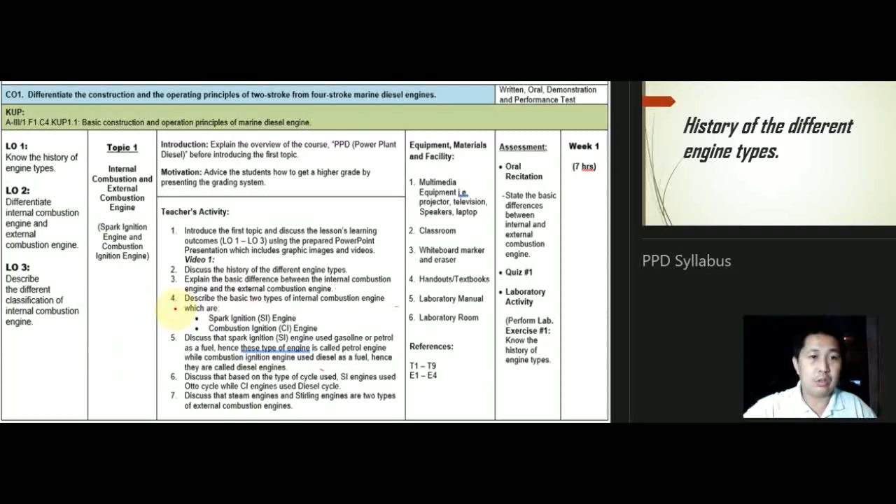We will continue with our topic. In this topic, we have to discuss the history of the different engine types. The invention of the internal combustion engine - various scientists and engineers contributed to the development of the internal combustion engine.

In 1791, the English inventor John Barber patented a gas turbine. Anyway, if you want to know all of this, the beginning of the history of the engine, just read this, and you can also read the encyclopedia. But I want to start here, which is very relevant to our main topic.

In 1892, Rudolf Diesel developed the first compressed charge compression ignition engine, which is a diesel engine. In 1926, Robert Goddard launched the first liquid fuel rocket.

In 1939, the Heinkel He-178 became the world's first jet aircraft. And in 1954, German engineer Felix Wankel patented a pistonless engine using an eccentric rotary design - the rotary engine.

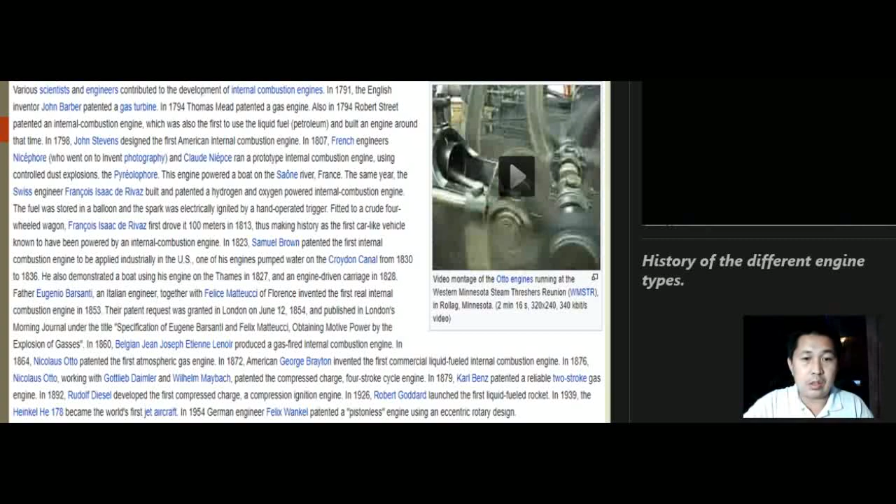So let's continue. We'll see here the old engine as they invented before.

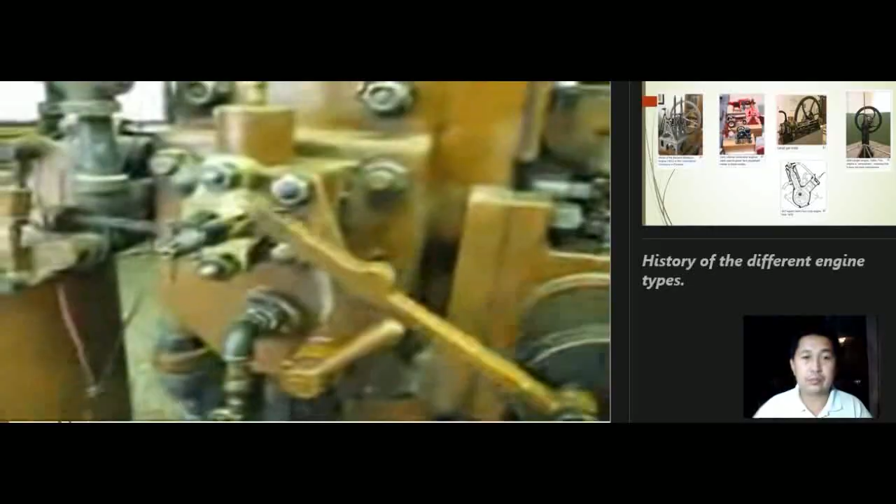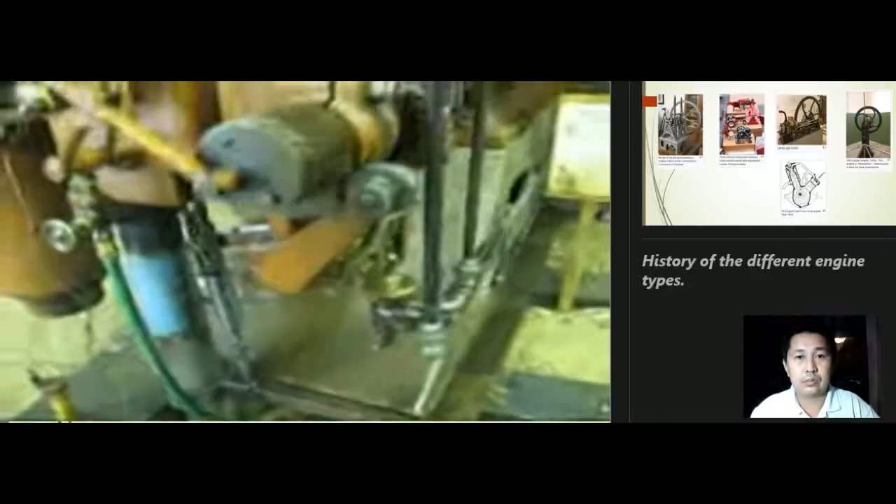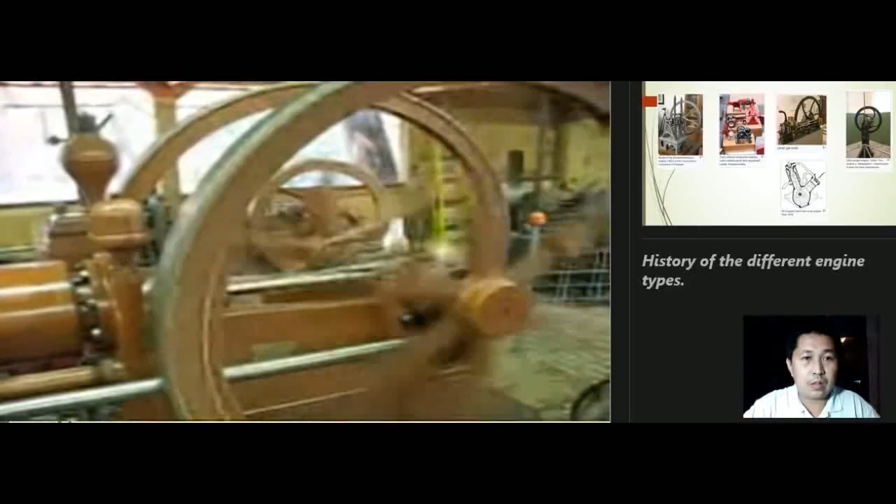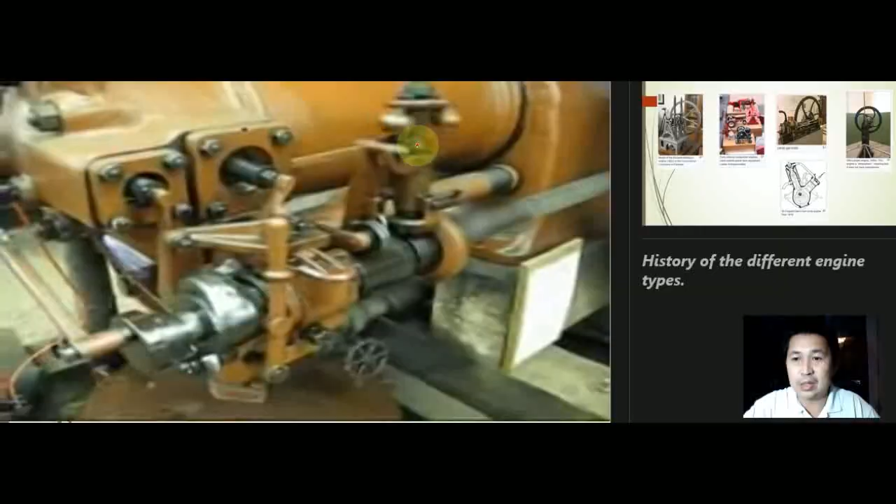So, old system engine. As you look at the governor, the flyweight of the governor is visible outside. But in newer engines, this flyweight is located inside the governor, so you cannot see it anymore. Let us proceed.

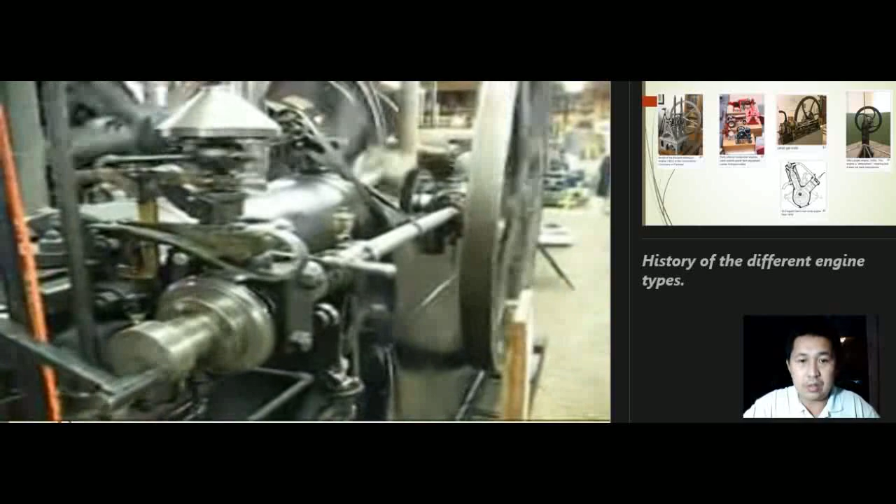These are engines that were invented long time ago, since the 19th century. So you cannot see this type of engine anymore nowadays.

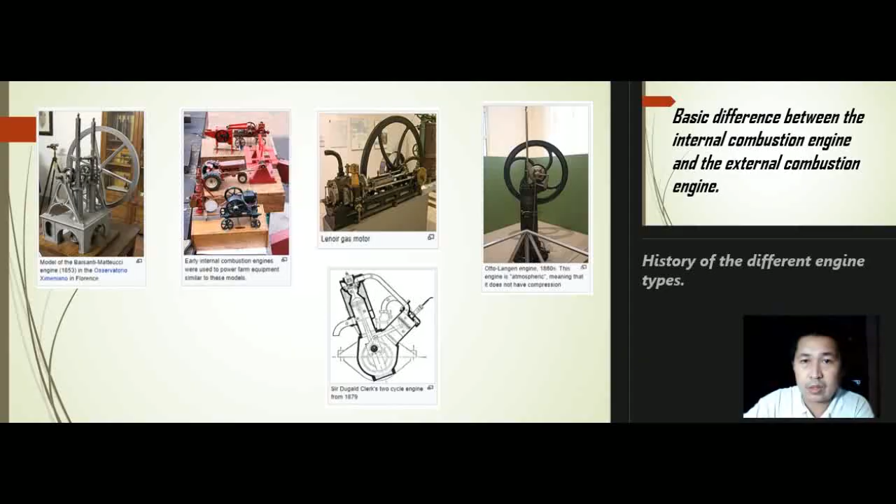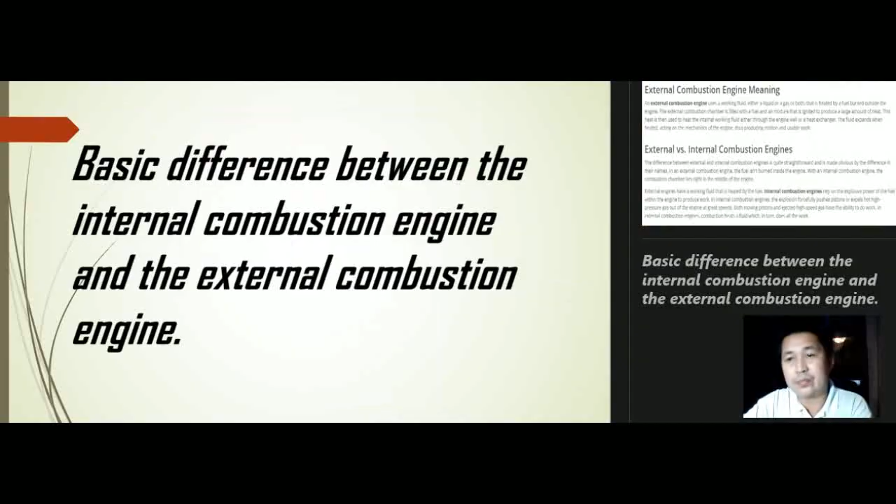Next, the basic difference between the internal combustion engine and the external combustion engine. An external combustion engine uses working fluid, either a liquid or gas or both, that is heated by a fuel burned outside the engine. One example of an external combustion engine that still exists nowadays is the steam engine, or steam turbine. Later on I will show you the video of the external combustion engine.

So, external versus internal combustion engine. The difference between external and internal combustion engine is quite straightforward and is made obvious by the difference in their names. In an external combustion engine, the fuel isn't burned inside the engine. With an internal combustion engine, the combustion chamber lies right in the middle of the engine.

So I will make a simple presentation here. In an external combustion engine, the fuel is burned outside, isn't burned inside the engine cylinder, meaning outside. So where is this fuel being burned? Here there is a boiler. The fuel and air mixture is burned through the boiler furnace to heat water.

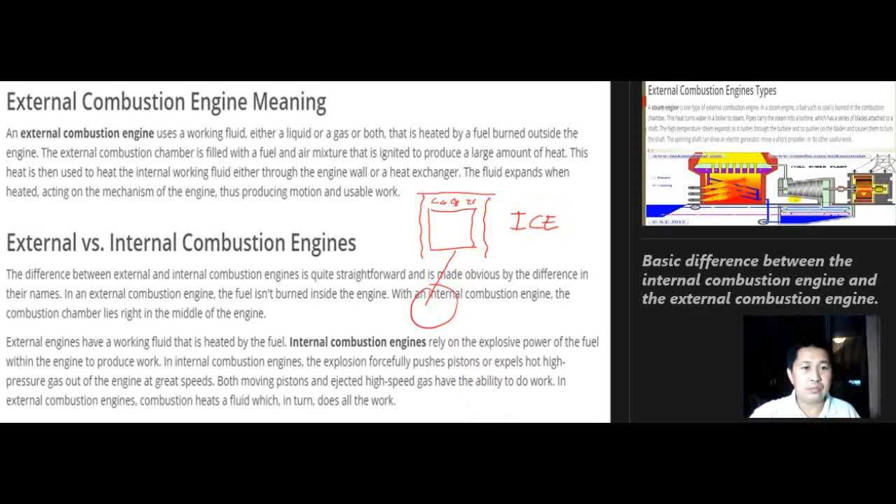So now let us proceed. This is an example of an external combustion engine, the steam engine, one type of external combustion engine. In a steam engine, fuel such as coal or bunker fuel is burned in the combustion chamber of the boiler.

This heat turns water in the boiler into steam. Pipes carry the steam into the turbine, which has a series of blades attached to a shaft. As you can see here, there is burning of air and fuel inside the furnace of the boiler, and in this pipe there is water circulated.

The water is being heated and produces steam. As you can see here on top of the steam drum, there is steam produced. This steam produced is pressurized and flows to the steam turbine, so the steam turbine blades spin or rotate due to the high pressure of the steam. This steam turbine blade is connected to the shaft, and the generator is connected to the shaft. So the generator is producing electricity. If this steam turbine is the main engine of your ship, then your ship will run.

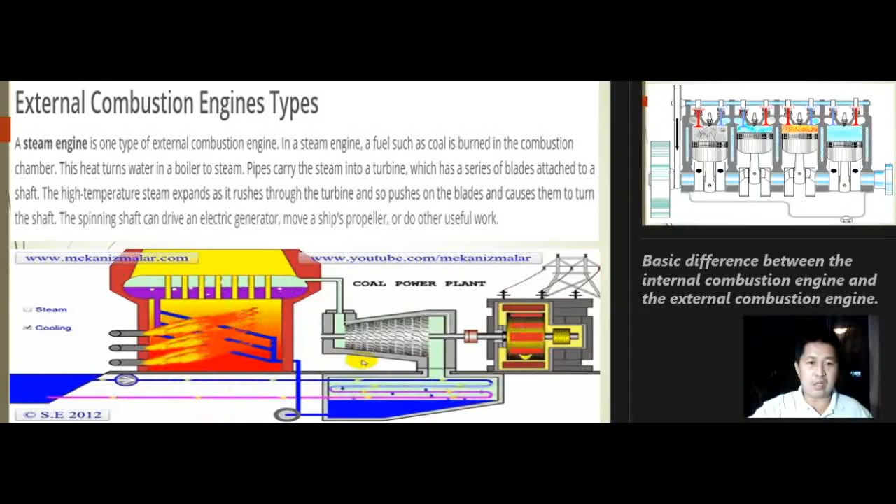So this is an example of an external combustion engine, because in the steam turbine engine itself there is no burning of air and fuel mixture; instead it happens in the boiler, which is outside the engine. So that is an external combustion engine. Let us continue.

Now, here is an example also of the internal combustion engine, because we are differentiating here between the internal combustion engine and the external combustion engine. As you can see, there is burning of air and fuel mixture inside the engine cylinder. All of the cylinder has burning of air and fuel, and this is called combustion. This is called internal combustion engine because the air and fuel mixture is burned inside the engine cylinder, as you can see. It is firing inside, there's combustion, so that is an internal combustion engine, or ICE.

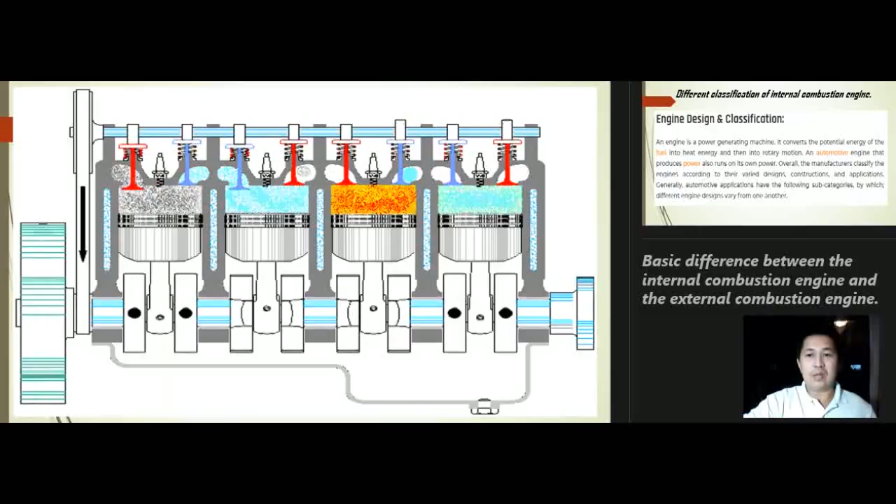So let us proceed to the different classifications of internal combustion engine: engine design and classification.

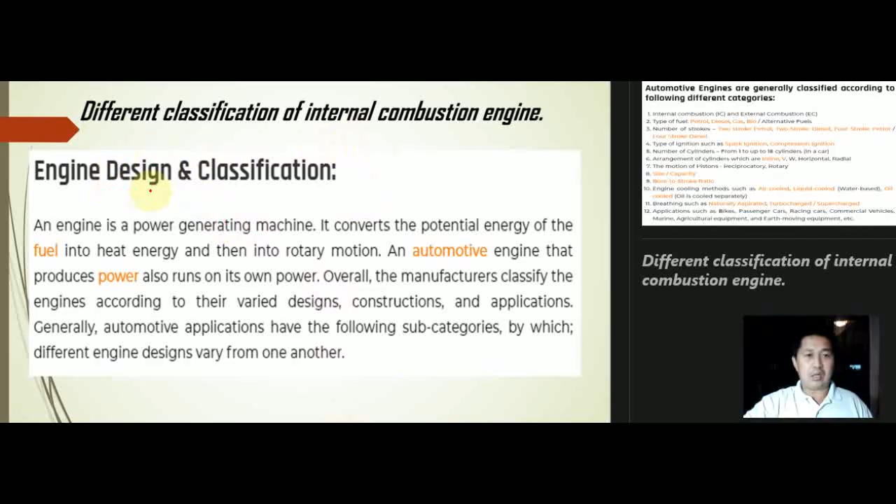So here in my presentation I use automotive engines. Automotive engines are generally classified according to the following different categories. On board the ship, our engine is bigger, a big engine. But here, although this is a smaller engine because this is for automotive, they are the same in principle. But in the design, like cooling system and others, they are different, but the principle is the same. So how are these engines categorized and classified according to their categories.

So we have internal combustion engine, IC, and external combustion engine, EC. We also have type of fuel, which is petrol. Petrol is a British term, but in American term this is gasoline. So we have diesel, gas, biofuel, and alternative fuels.

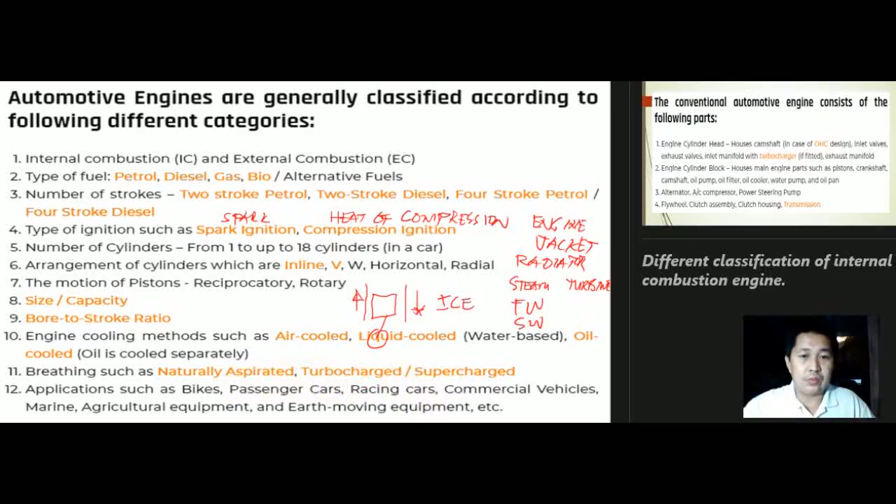So the conventional automotive engine consists of the following parts. Just read the parts of the engine.

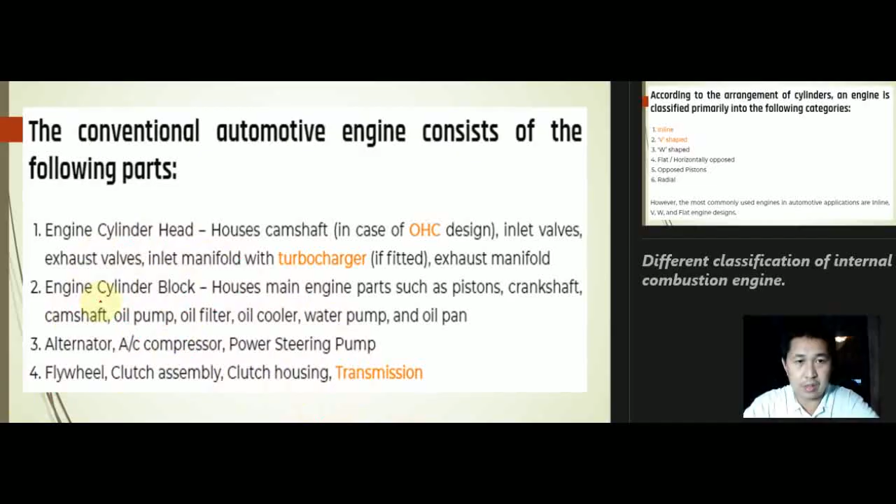According to the arrangement of the cylinders, an engine is classified primarily into the following categories: we have inline type, V type, W type, flat horizontally opposed engine, opposed piston, and radial.

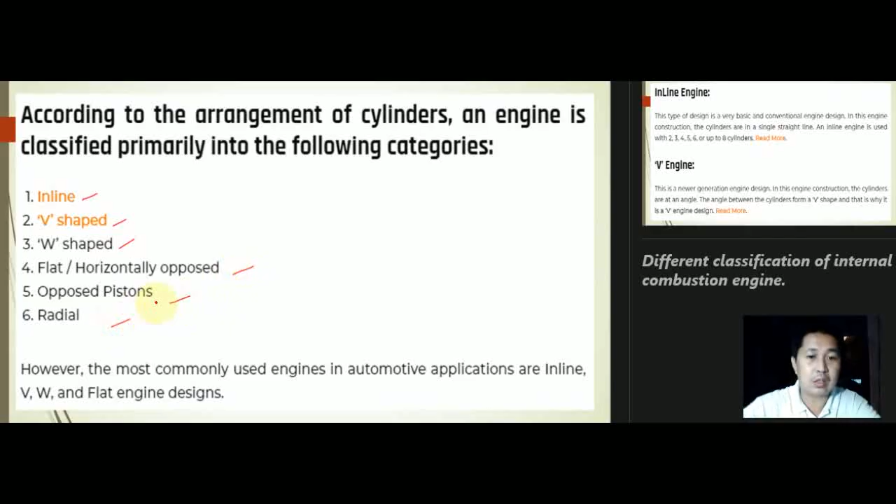So just remember this: when you hear that the cylinders are in a straight line, this means inline engine. The angle between the cylinders forms a V shape - remember, these cylinders form a V shape. This one is V-type engine.

So what is an inline engine, its design and characteristics? An inline engine is a type of engine design that is very basic and conventional. In this type of engine construction, the cylinders are placed in a straight line - remember this keyword. As you can see here, the cylinder is arranged in a straight line, so that is inline type engine.

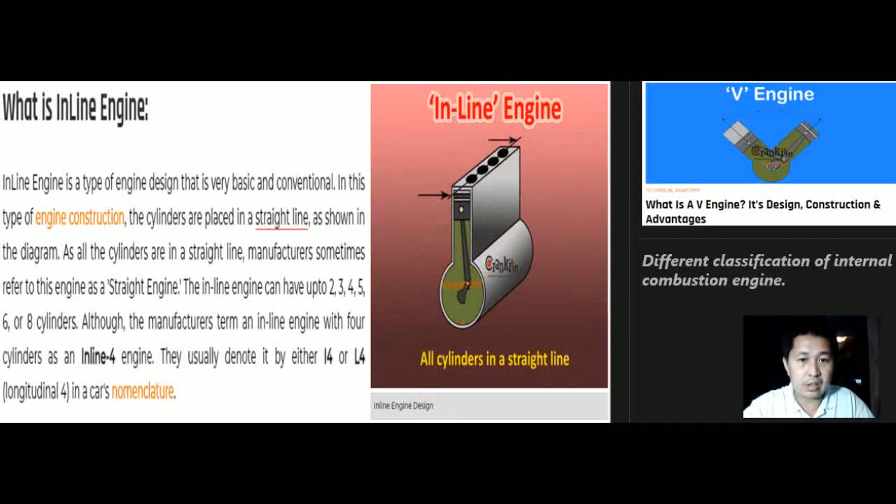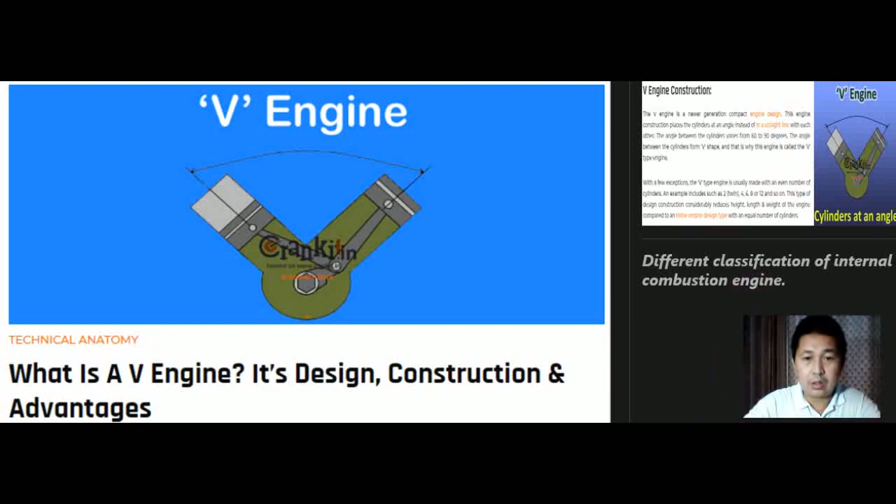So what is a V engine or V-type engine, its design, construction, and advantages? Let us proceed. The V engine is a newer generation compact engine design. This engine construction places the cylinder at an angle instead of in a straight line with each other. As you can see here, this forms a V - that's why we call this engine V-type engine. So cylinders are at an angle of 60 to 90 degrees.

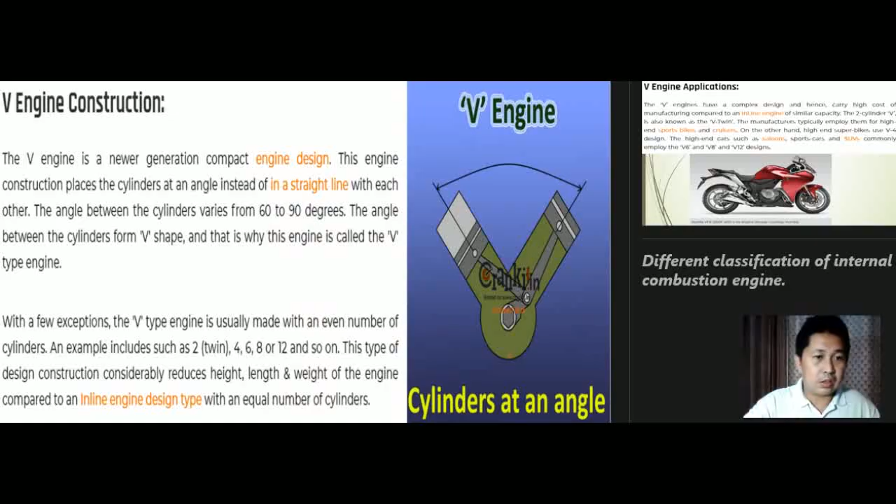One example here of application is this big bike, the Honda big bike, which has a fitted V-type engine. But on board the ship, I experienced this before - I experienced a Caterpillar engine. This engine is a disadvantage to the engineers during overhauling because there is a lot of pistons to overhaul. I experienced a Caterpillar engine with 16 cylinders, so a lot of pistons to overhaul, whereas if the engine is inline, there are only a few pistons, and it is more comfortable to overhaul because the inline engine has only a few pistons, whereas the V-type engine in a bigger engine has a lot of pistons.

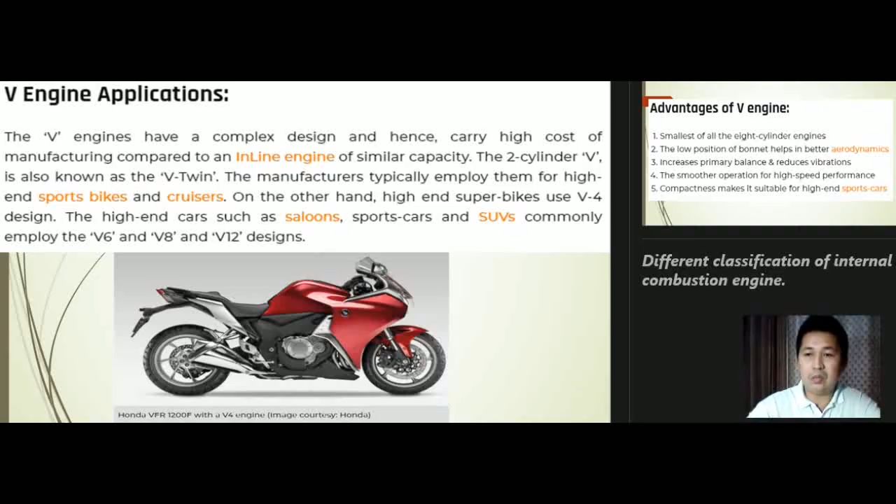So we have also here the advantages of the V engine. So the smallest of all the 8-cylinder engines. The low position of bonnet helps in better aerodynamics, increases primary balance and reduces vibrations. The smoother operation for high speed performance. Compactness makes it suitable for high-end cars, sports cars.

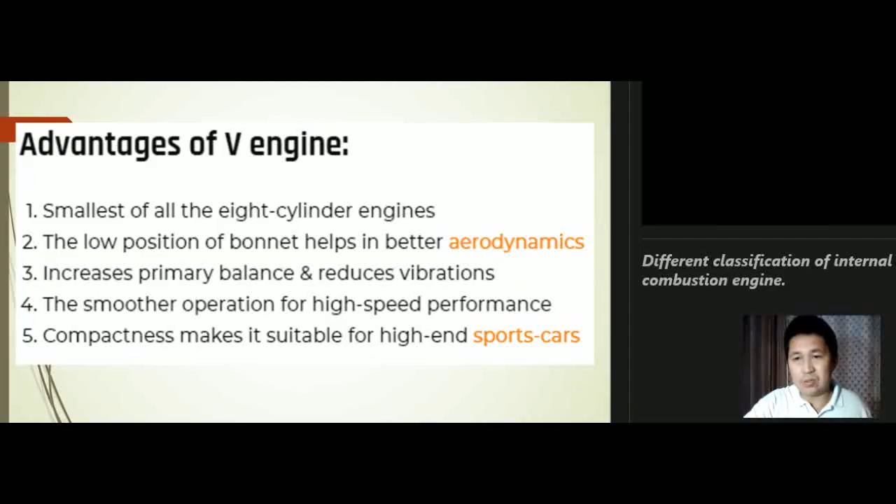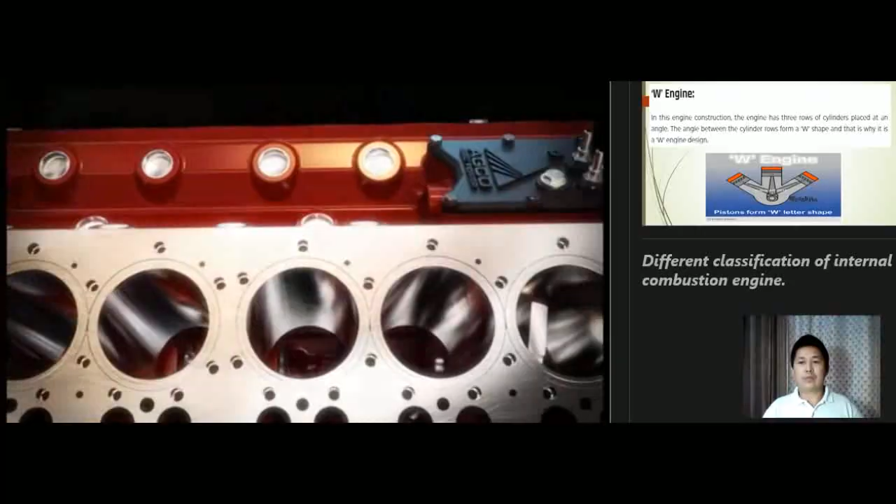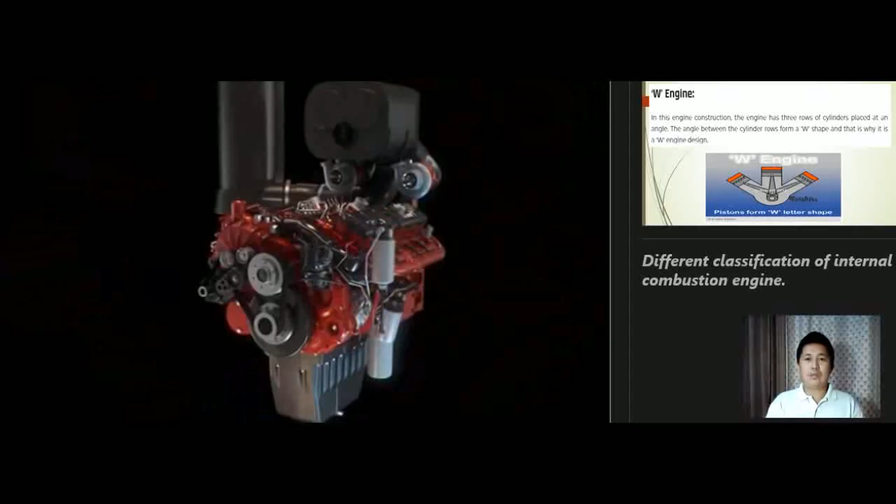So this is good for the automotive engines, but in the marine engine, if the engine is V type, during overhauling there are a lot of pistons to overhaul. So it is not comfortable for the engineers during maintenance and overhauling. So I will show you an example of V-type engine. So as you can see, that is V-type engine.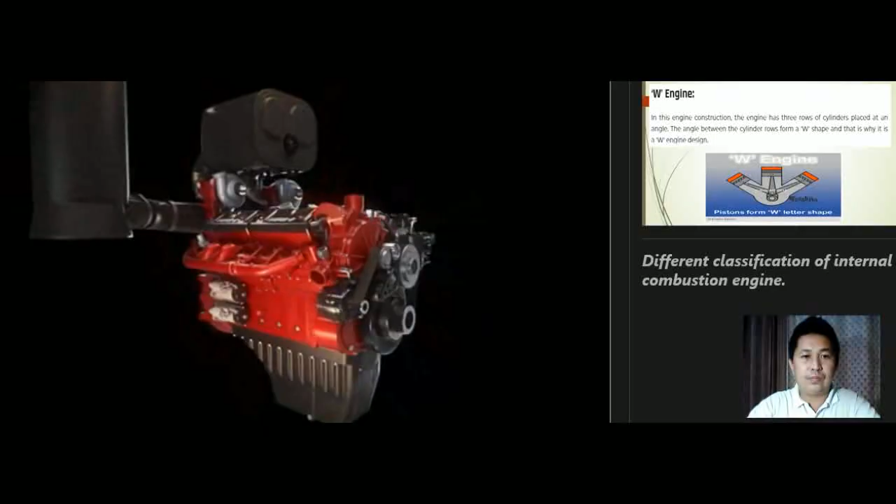So if we have a V-type engine, we have also W-type engine. In this engine construction, the engine has 3 rows of cylinders placed at an angle. The angle between the cylinder rows forms a W shape, and that is why it is a W engine design. In my experience, I did not see this engine before. I do not know where this engine is being applied or fitted.

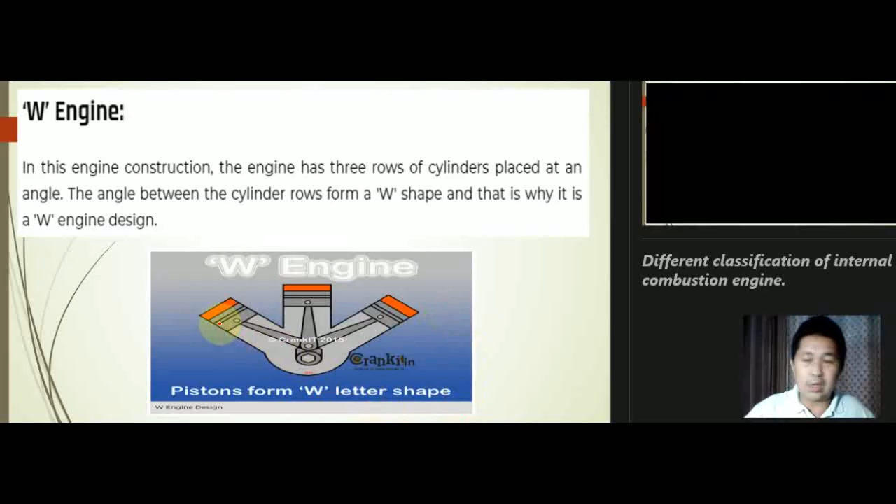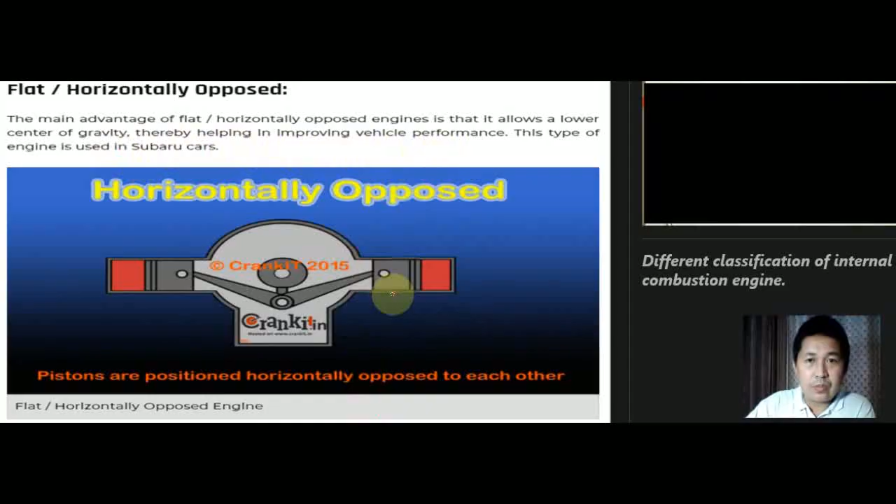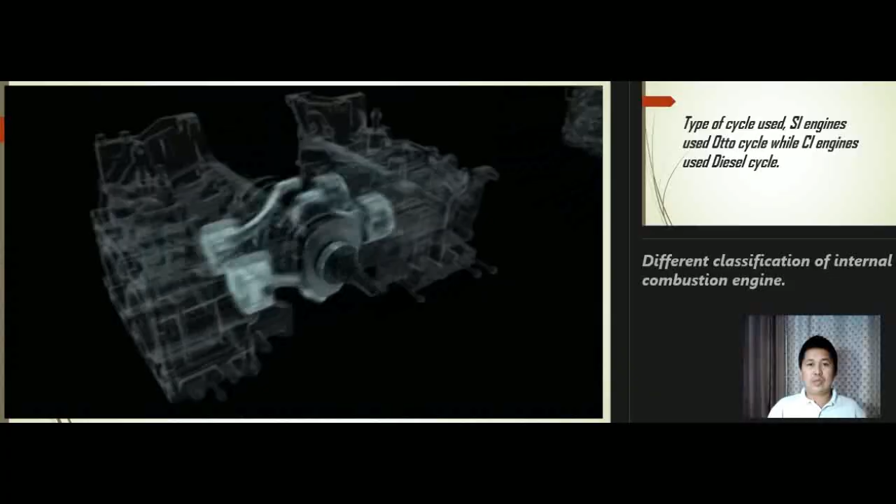So we have also flat horizontally opposed engine. The main advantage of flat horizontally opposed engines is that it allows a lower center of gravity, thereby helping in improving vehicle performance. This type of engine is used in Subaru cars. We have here the clips. This is also called boxer engine, mostly fitted to Subaru automotive cars. So that is a flat engine, as you can see. The piston is in a horizontal position, both sides.

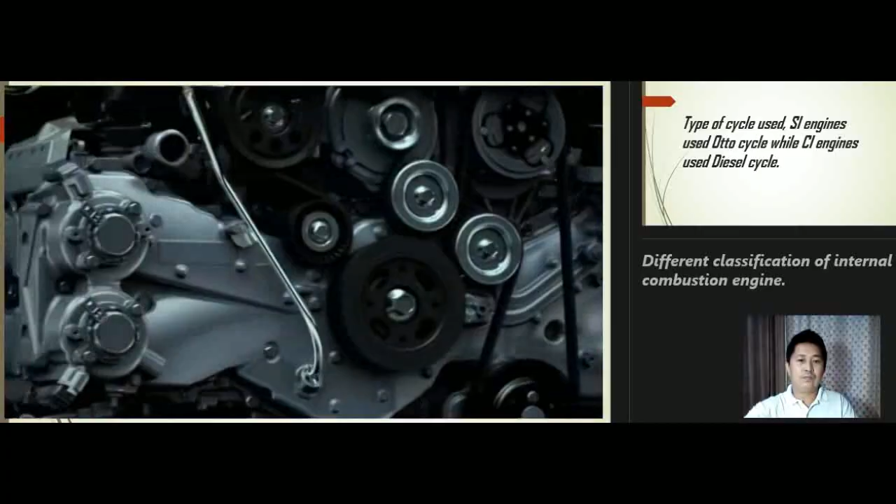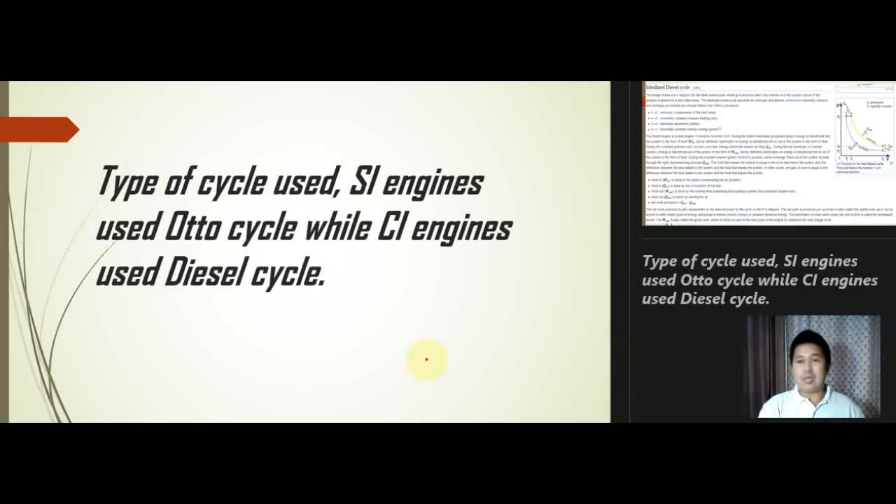So we will proceed to the type of cycle used. SI engines use the Otto cycle, while CI engines use the diesel cycle. For your information, the internal combustion engine uses the principles of thermodynamics. So we have here a PV diagram for the ideal diesel cycle. The cycle follows the numbers 1 to 4 in a clockwise rotation. Later on, we have to differentiate the difference between the Otto cycle and the diesel cycle.

So if you were being interviewed, the question is: what is the difference between the Otto cycle engine and the diesel cycle engine? You have to answer: in the Otto cycle engine, during ignition and combustion, the pressure increases, while in the diesel cycle engine, during ignition and combustion, the pressure is constant. So here is the diagram.

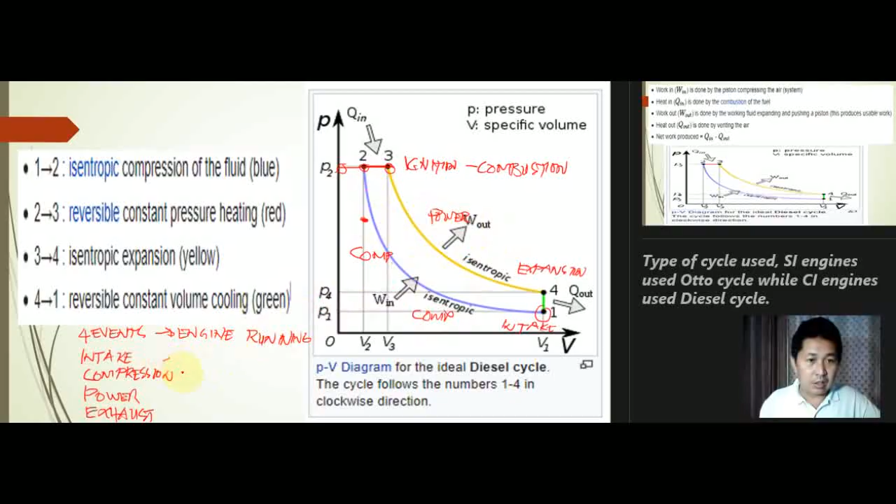So from 3 to 4, that is called power. So intake, compression, power, and 4 to 1, that is exhaust. That is the cycle of the engine, the diesel cycle. 1 to 2 is isentropic compression. 2 to 3, reversible constant pressure heating, or heat addition. Here, Q in is called heat addition.

Because the ignition and combustion is occurring here in 2 and 3. Here is isentropic expansion, because the expansion of gases after the combustion is happening inside the engine cylinder and pushing the piston down. So this is your piston. This is your cylinder. And this is your piston. So during expansion here, combustion, there is an expansion of hot gases, and it is pushing down the piston so that the crankshaft will rotate. So that is isentropic expansion when we are using thermodynamics.

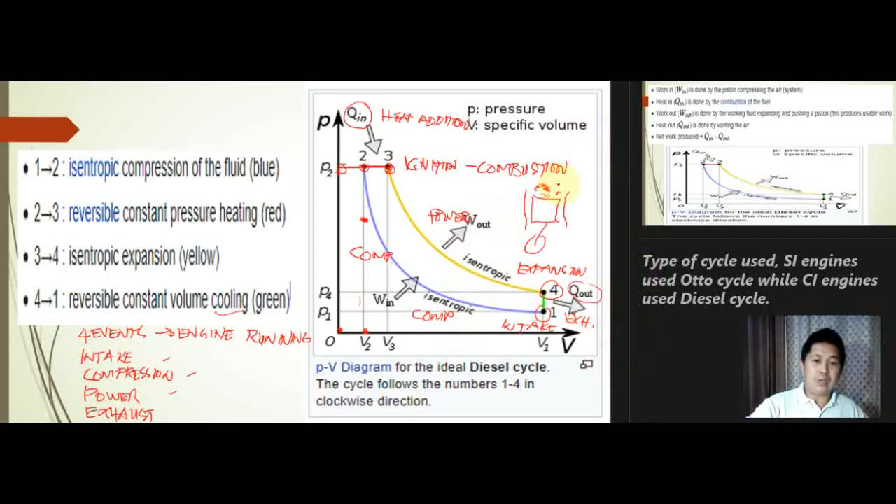of air. But during combustion, the pressure inside the cylinder is constant during ignition and combustion, and by the result of the combustion, there is an expansion of hot gases. So at the start of the expansion, the pressure is highest, and then the pressure is lowering because the piston will go down and the space of the cylinder becomes bigger. So that is the explanation of the diesel cycle, and we'll proceed to the next.

So we have here work in, done by the piston compressing, from 1 to 2, and heat in, which is heat added, done by the combustion, from 2 to 3, and work out, done by the working fluid expanding and pushing the piston. This produces usable work, from 3 to 4, and then heat out, or heat rejection, done by venting air, from 4 to 1. The exhaust gases are released through the exhaust pipe leading to the atmosphere, pushed by the pressure of fresh air, and then the cycle repeats.

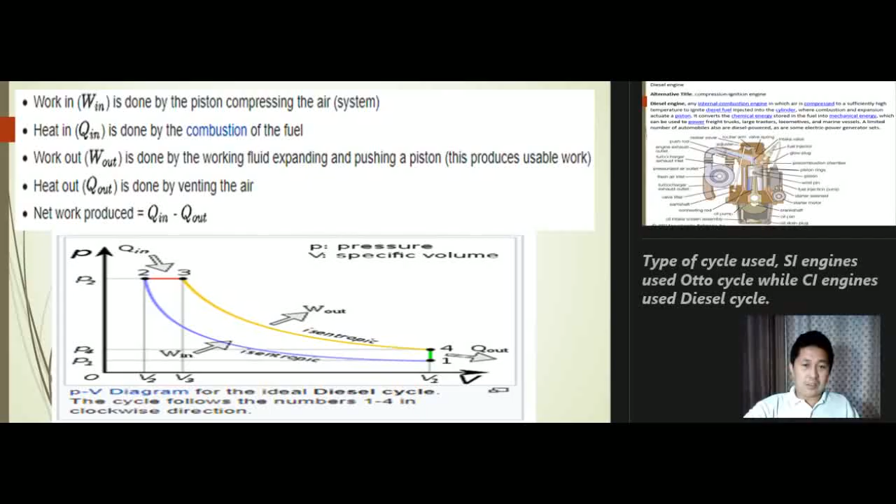Then from 1, again it is an intake stroke, then compression stroke, 1 to 2. Here is the ignition and the combustion, 2 to 3, and 3 to 4 is the power stroke, and 4 to 1 is the exhaust. So that is the cycle of the diesel engine when it is running. So we have here the parts of the engine. You just read all the parts for the purpose of your familiarization. So you just read.

So in the description here, the internal combustion engine in which air is compressed. As I discussed a while ago, this belongs to the diesel engine, or CI engine, because the method of igniting fuel here is by means of heat of compression. So chemical energy, which is your fuel; mechanical energy, which is the energy being created by your engine when it is running, creating power.

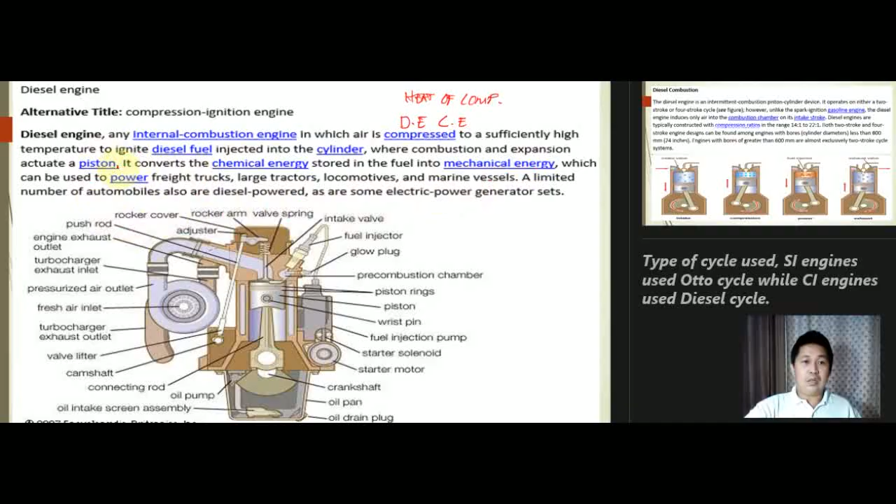So as you can see in this presentation, intake stroke, the piston is at bottom dead center, your intake valve is open, and the supply of air is entering the cylinder. In the compression stroke, the piston is moving upward, your intake valve is closed, so your air is being compressed. And we have here the power: the fuel is sprayed by the fuel injector, and because of the heat of compression, it will ignite the fuel and air mixture, resulting in combustion inside the cylinder and an expansion of hot gases.

Therefore, your piston is being pushed by the expanding gases. Your piston moves down to rotate the crankshaft. The last stroke is the exhaust stroke. Your exhaust valve is open, your piston is moving upward, and your exhaust gases are expelled through the exhaust valve to the exhaust pipe leading to the atmosphere, and then it returns again to the intake stroke. So that is the cycle of the internal combustion engine in this presentation. This is a diesel engine.

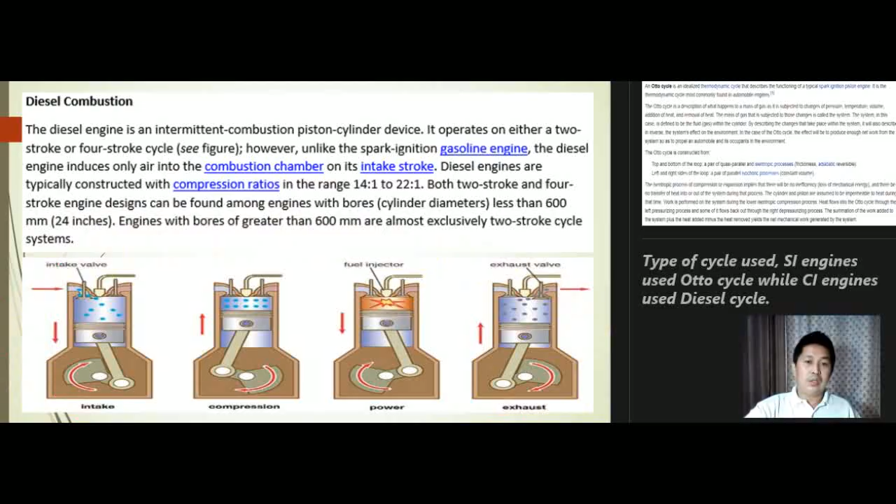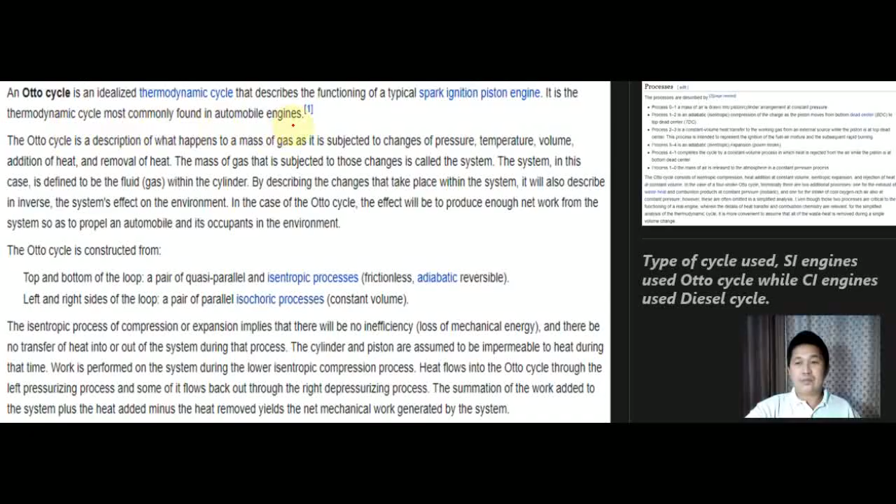So we will proceed to the Otto cycle. The Otto cycle is an idealized thermodynamic cycle that describes the functioning of the typical spark ignition piston engine. It is the thermodynamic cycle most commonly found in automobile engines. So let us proceed. Here I will explain to you how this Otto cycle works. We are now using the pressure volume diagram taken from thermodynamics. As you can see, from 0 to 1 here, this is intake stroke.

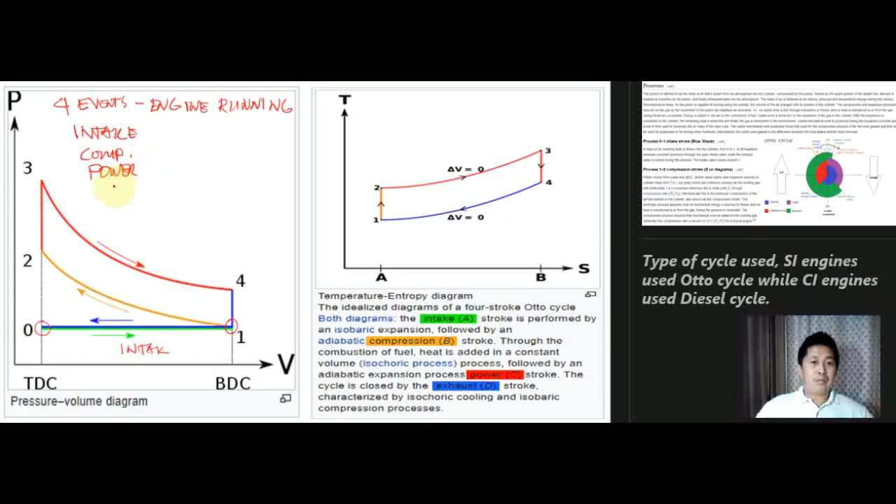So four events: intake, compression, power, exhaust. So 1 to 2 is compression. 2 to 3 is ignition.

So ignition, combustion. And then 3 to 4 is power or expansion. And then 4 to 1 is exhaust.

So as you can see, as I mentioned a while ago, during the ignition and combustion, the pressure increases in the Otto cycle, while in the diesel cycle it is constant. So in the diesel cycle here, the pressure is constant, so 2 to 3. But in the Otto cycle the pressure is increasing. So that is the difference of the Otto cycle and the diesel cycle.

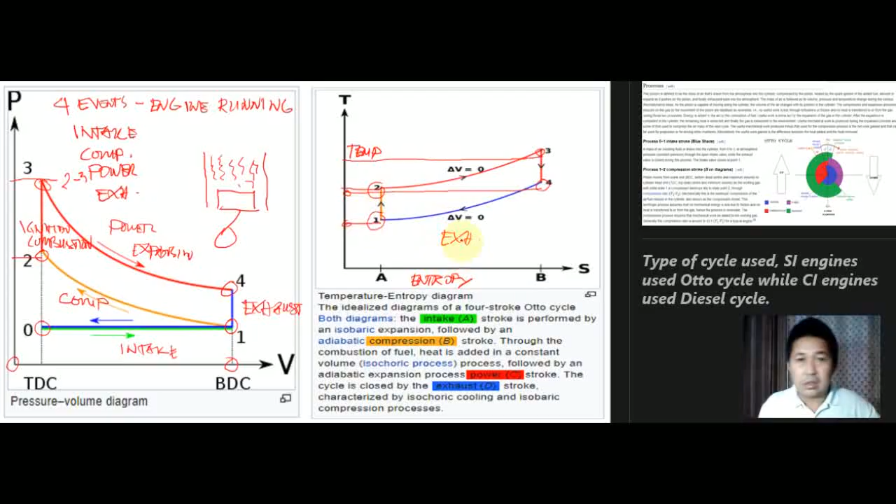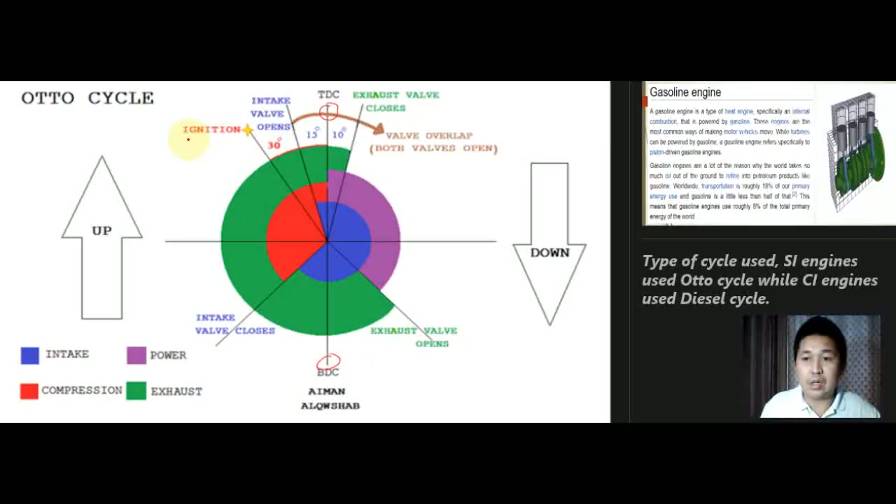So next, this is your Otto cycle, the rotation of the crankshaft in relation to the position of the piston. So here the piston is at TDC or top dead center, and here the piston is at BDC. So the position of your crankshaft at 30 degrees before top dead center is ignition. This is igniting of the air and fuel mixture at 30 degrees, and at 15 degrees

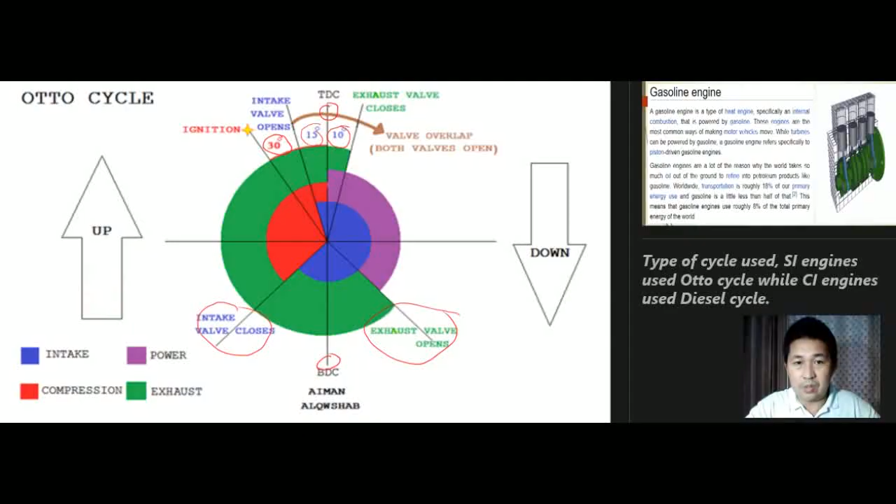the intake valve opens 15 degrees, and again valve overlap 10 degrees. So the exhaust valve closes at 10 degrees. So in relation to the rotation of your crankshaft, here the intake valve closes at this position, and at this position the exhaust valve opens. So that is the rotation of the crankshaft in relation to the position of the piston and the opening and closing of the intake and the exhaust valve.

So we have here the gasoline engine. It's a type of heat engine, specifically an internal combustion engine that is powered by gasoline. So in British terms, this is a petrol engine. Petrol.

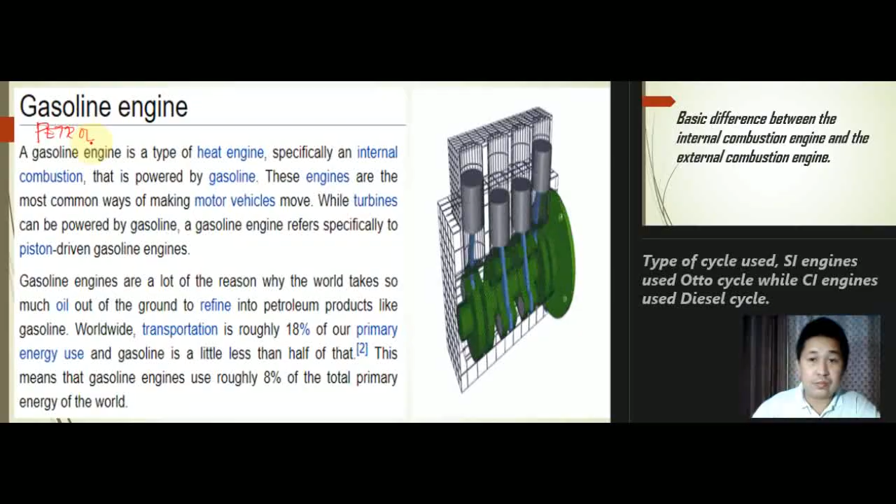So now we will proceed with the basic difference between the internal combustion engine and the external combustion engine. So as you can see here, the difference between the SI or spark ignition engine, which is the petrol or gasoline engine, and the CI engine, which is the compression ignition engine or diesel engine. In the SI engine, there is a spark plug. So this is the spark plug. But here, in the CI engine, there is no spark plug, but you can see here the injector.

So here, the method of igniting fuel is by the use of spark. That's why this is called SI or spark ignition. So this is a gasoline engine. And this one is a diesel engine. So the method of igniting the fuel in the diesel engine is heat of compression. So that is the difference between these two, the SI and the CI engine.

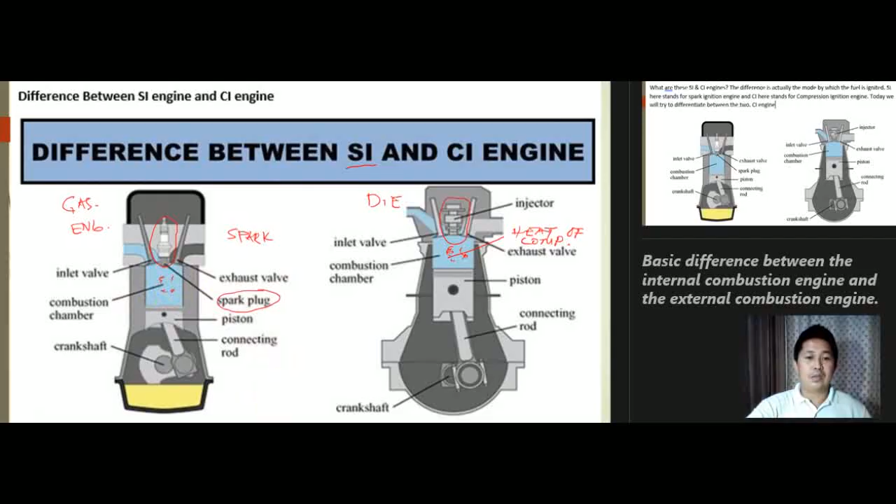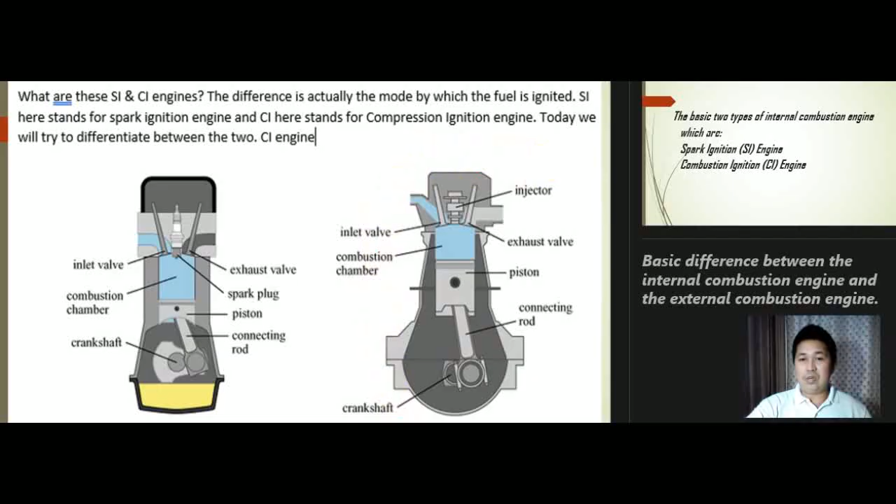So what are these SI and CI engines? The difference is actually the mode by which the fuel is ignited. SI stands for spark ignition engine, and CI stands for compression ignition. So that is the difference between the SI engine and the CI engine. So the basic two types of internal combustion engine are spark ignition, SI engine, and compression ignition, CI engine.

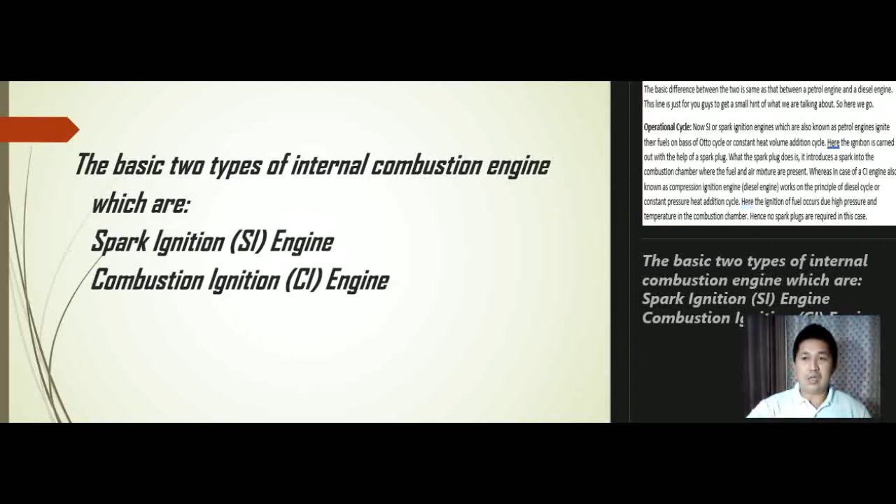So when it comes to operational cycle, as I already discussed, but here there is an explanation. SI or spark ignition engines, which are also known as petrol engines, ignite the fuel on the basis of the Otto cycle, as I discussed a while ago, or constant volume heat addition cycle. Here the ignition is carried out with the help of a spark plug. The spark plug introduces a spark into the combustion chamber where the fuel and air mixture

are present. Whereas the CI engine, also known as compression ignition engine or diesel engine, works on the principle of the diesel cycle or constant pressure heat addition cycle. So remember the difference. Here the ignition of fuel is due to the pressure and temperature in the combustion chamber. Hence, no spark plugs are required in this case. So remember the difference.

Diesel cycle uses constant pressure heat addition. So constant pressure, and Otto cycle uses constant volume heat addition. So that is the difference of the operational cycle of the Otto cycle and diesel cycle. So let us continue.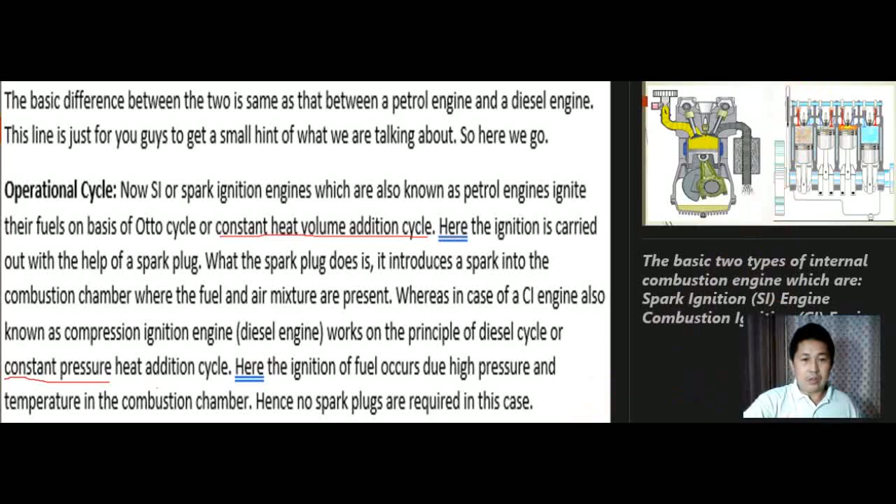So we have here an illustration. As you can see, there is a spark plug for the Otto cycle, which is igniting the air and fuel mixture inside the cylinder. But for the diesel cycle, there is no spark plug. As you can see here, there is an injector. So the method of igniting fuel in the diesel cycle is by the use of heat of compression, but in the Otto cycle it is using the spark of the spark plug to ignite the air and fuel mixture.

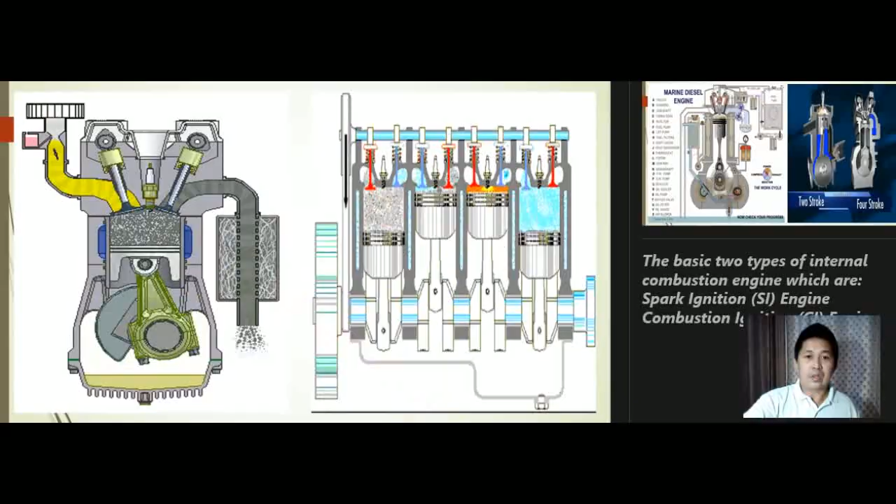So this is the diesel cycle CI engine, compression ignition engine, as you can see. There is no spark plug, but there is an injector here, spraying fuel, and the method of igniting fuel here is heat of compression.

So we have the comparison here of the 2-stroke and 4-stroke. So if you are being assessed by the assessor, let's say the question is, what is the difference between 2-stroke and 4-stroke engine? In terms of the construction, 2-stroke has no intake valve, but instead there is a scavenging port. This one. This is the scavenging port.

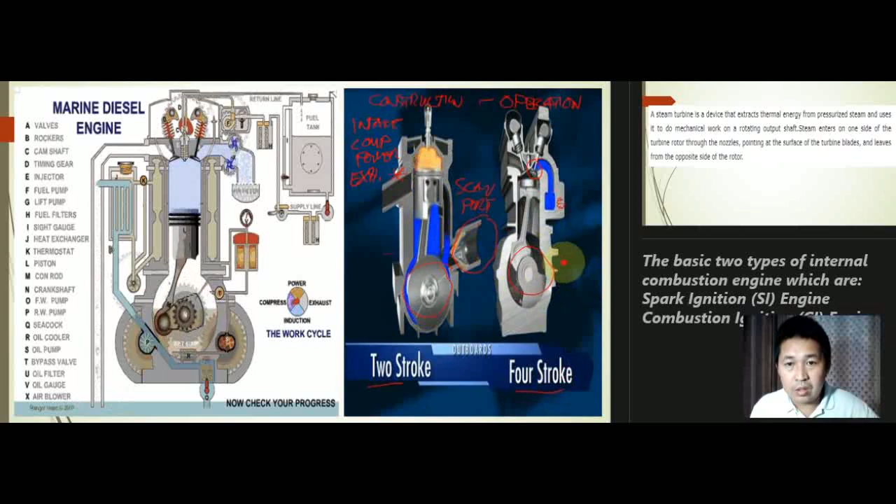So 2-stroke engine completes 1 power cycle in 1 revolution of the crankshaft, whereas 4-stroke engine completes 1 power cycle in 2 revolutions of the crankshaft. Here is 1 revolution. So that is the difference between the 2-stroke and 4-stroke when it comes to operation and construction.

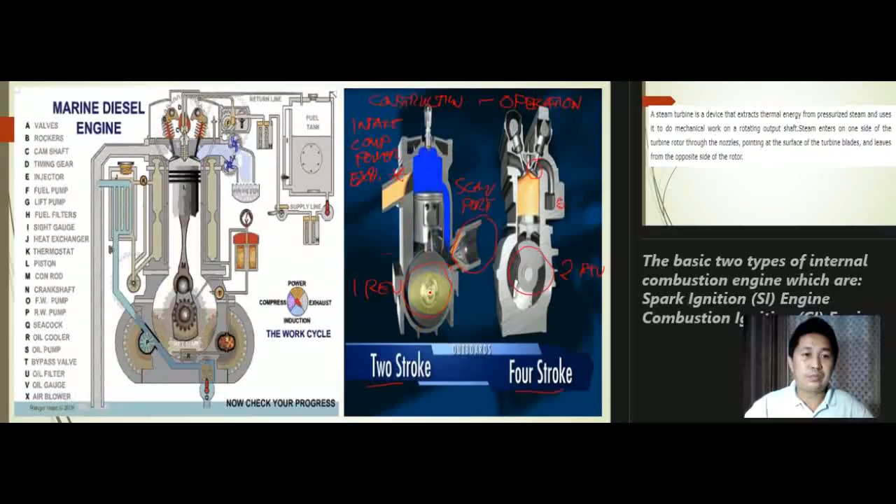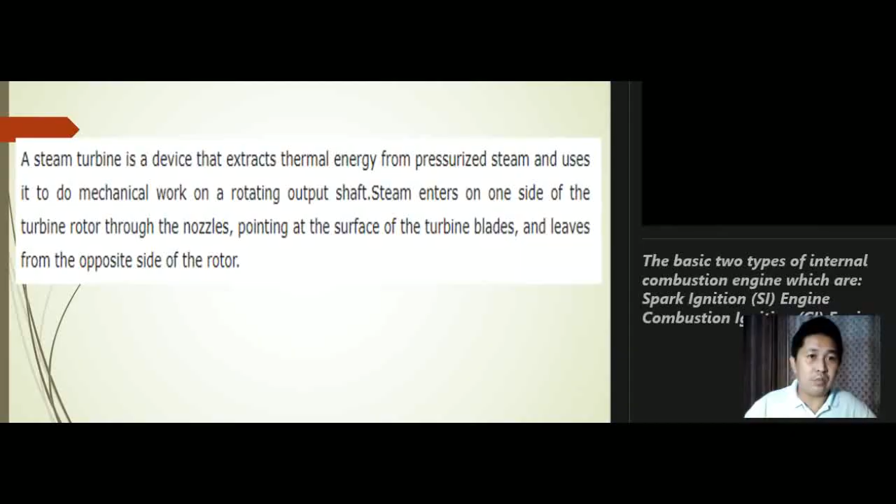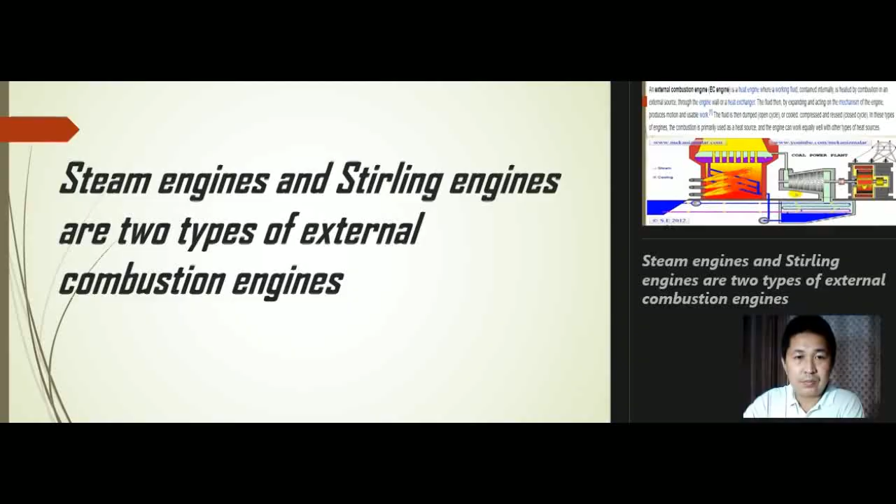So we will also discuss the steam turbine. A steam turbine is a device that extracts thermal energy. Steam engines and Stirling engines are 2 types of external combustion engines. So this is an example of an external combustion engine as I showed you before. This is a steam engine. It uses steam to turn the turbine.

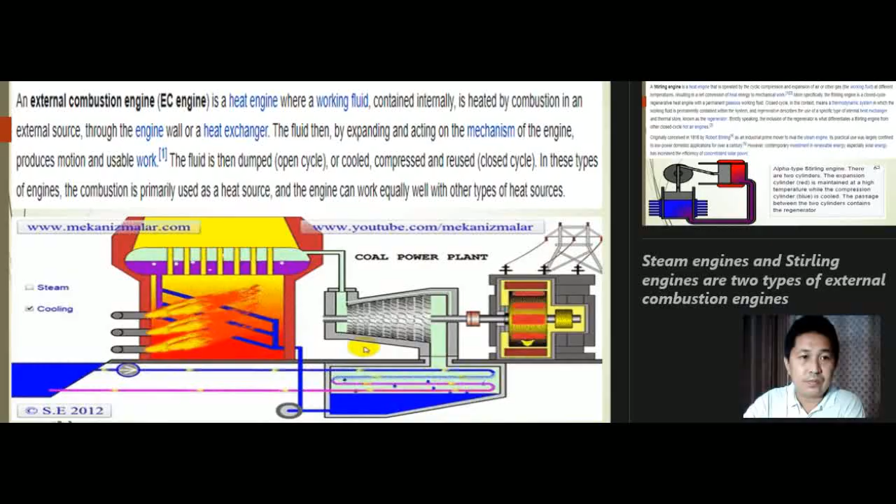So why is this an external combustion engine? Because the fuel is burned outside the cylinder, which is in the boiler. So this is an external combustion engine. We also have here an example, the Stirling engine. A Stirling engine is a heat engine that is operated by the cyclic compression and expansion of air or other gas.

Nowadays, based on my experience, I did not see this type of engine. This is an Alpha type Stirling engine. I don't know what application or what machine this engine is fitted to. But since there is a Stirling engine in your topic, I included this topic here, because it is included in your topic.

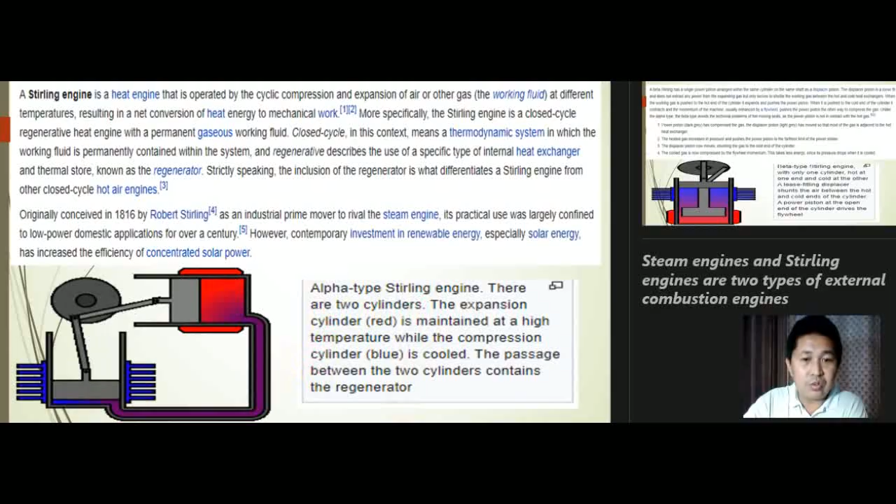So we have two types, alpha type Stirling engine, and we also have here the beta type Stirling engine. The beta type Stirling engine has a single power piston arranged within the same cylinder on the same shaft as the displacer piston. I cannot find this engine on board the ship, so I don't know where this engine is being fitted or used.

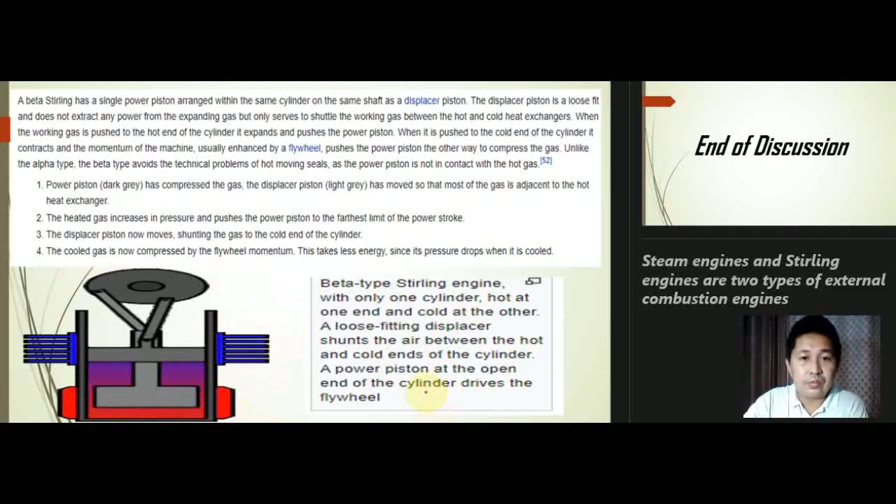So this is the end of the discussion.